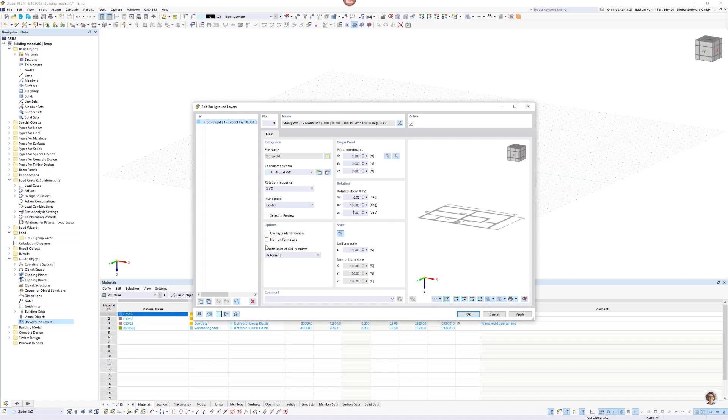I have a predefined DXF named Storey. I will change the rotation about 180 degrees to have it on the other side. I can check if I have separate layers, which is the case here, and import it. I will directly move it into the Z direction.

Now, when you look at the left side of this building, I will define my stiffening walls, my stiffening elements. So it goes from the left top corner to the middle corner, the bottom middle, and the left bottom side—that's where the stiffening core of the structure will be. And on the right side, I will create the facade elements.

Before modeling it, I have to go into the objects of the building model and define my stories. I want to define 5 stories, each with a height of 3 meters. So 1, 2, 3, 4, 5.

We have several options for the floor modeling. I will explain them all when we come to that, but we will start with the floor modeling set to nothing, which is just an advanced output of the structure. The other modeling types—rigid, diaphragm, semi-rigid, and also load transfer—require or generate different modeling. And with rigid or semi-rigid diaphragm, we can also have different nodal support modeling and different line support modeling. But I will show all that later on.

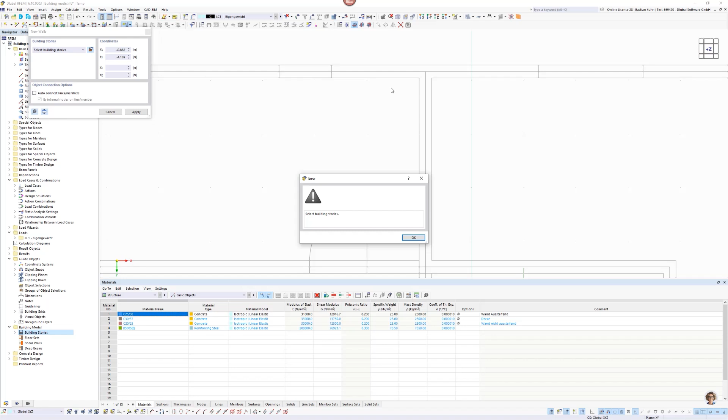You see, with the building story or building model add-on, there's already information coming on the mass of my structure. Right now I've defined two walls, or two parts of the wall, and I have a complete weight of 9.72 tons. When I'm moving it out a little bit, that's not enough, but maybe we can go a little further in here. So you see that the mass center is moving while I'm defining more surfaces. That's information already generated by the building model add-on.

Okay, so I have to do this now for each of these parts for the complete kernel, to this edge, to this edge, and from this to this. So my building is closed now, and you see that the mass point, or mass center, is nearly in the middle of the structure. And I already have a weight of 42 tons.

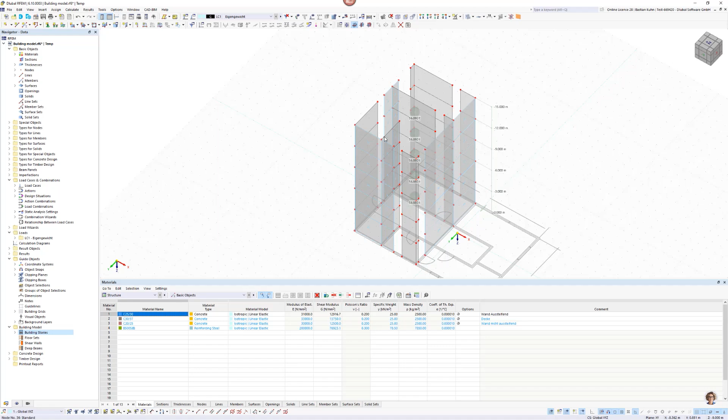And of course, I said it here in this case, we will need a few more posts, and maybe we will put some kind of drywall or masonry wall or something like this on this part in order to reduce the free span, because if I do not activate these walls in here, I will probably get problems with the deflection or the vibration of my structure.

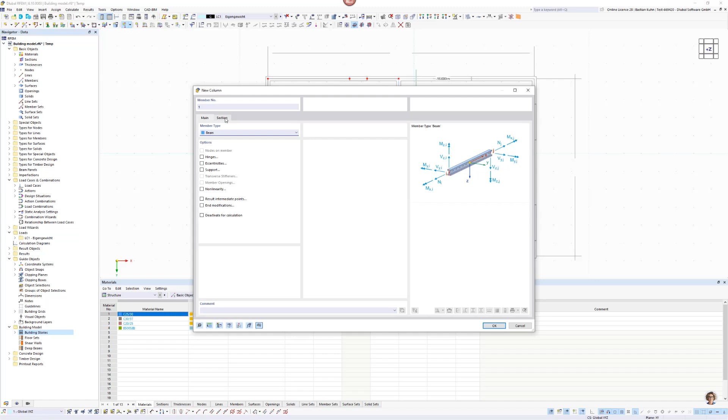So I will proceed with the columns. Therefore, I will define a quite bigger section inside here. Let's create a new section and give it the dimension 275 by 275. We can use timber material here, the so-called Baubuche, which is perfect if you have quite a high pressure force there.

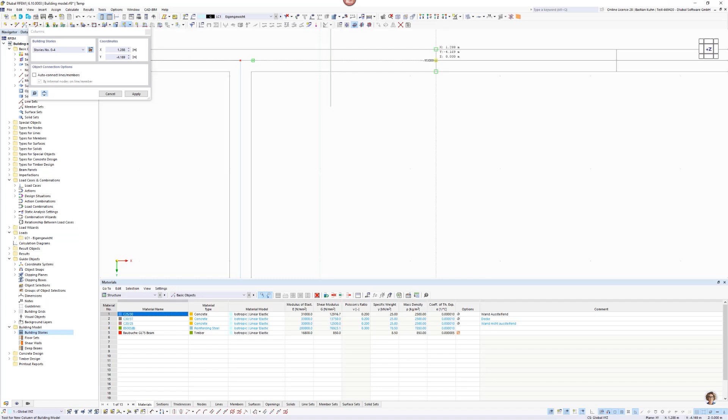And I can take a look if all stories are activated. That is the case in here. So I will say, okay, I have probably a column in here and a column there, and one on the edge here.

And where else can we have one? Yeah, probably here. This, this, this, this, this. Oops, that was wrong. Oh, I can just go one step back. And that's still working. Okay, so these are my columns.

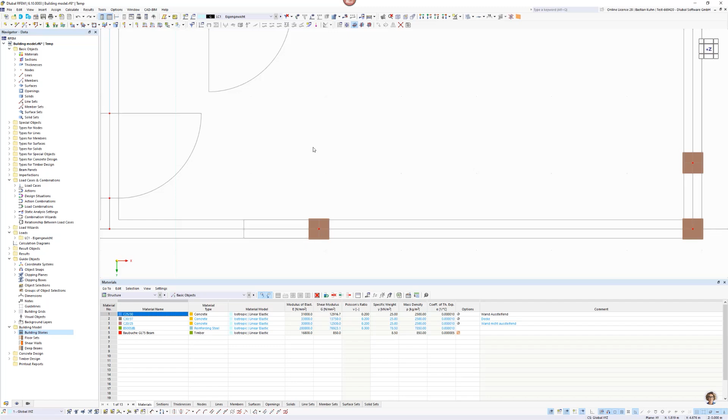This one's actually a little bit too narrow to me. I will also undo this step. So that should be enough for this now.

I can directly put a hinge on top of those columns so that they will not bear any moment transfer. So I say, okay, hold on, not the walls, I only want to activate the members. Edit, and define a hinge at the member, just a simple ordinary moment hinge.

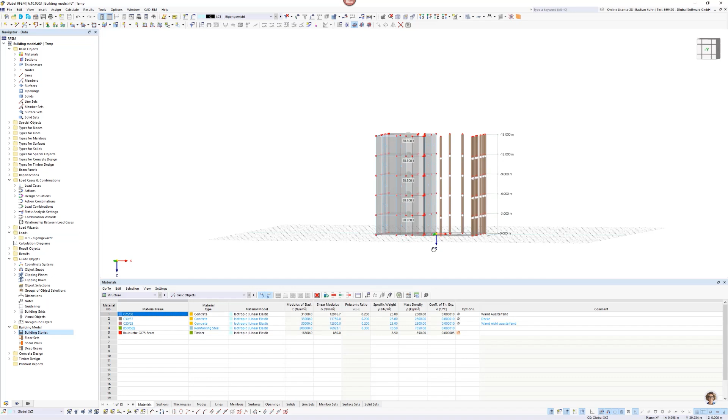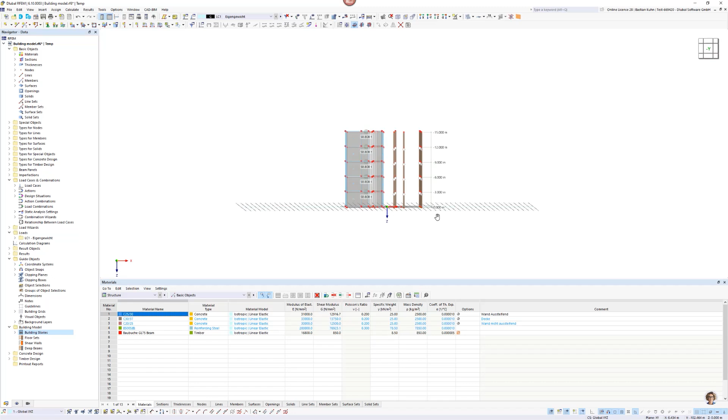Okay, so that works. And go back into the Z direction, or maybe I will define now already the supports, at least the column supports. That is also just a hinged support here.

And now, for transferring the force from the facade to the columns, in former times with the building model add-on this was not possible, as we used to integrate some kind of hierarchy to it. This is possible now, and I want to show that to you.

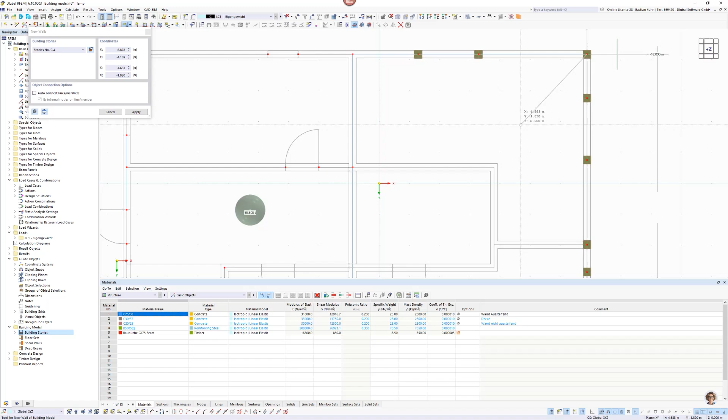So the load transfer surface can be quite simple in here, from this edge to this edge, and to the bottom edge.

Oops. And to this point. Okay. So it's also there.

I said in this area, I want walls that do not stiffen my structure. They should only put the forces from the top story to the ground.

So I will define again the load type wall, but with standard behavior, and create a new thickness called wall shear free. The picture explains this thickness type: it can transfer forces into the global X and Y direction of a wall element.

I'm choosing a different material, let's say wall not stiffening, and it can be a little bit bigger. Let me take a look at what I wanted inside it. We will take it as 175.

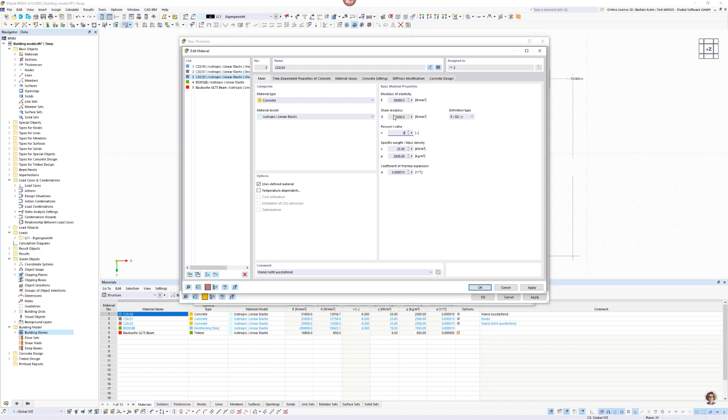We will take a look at the material and get rid of the Poisson's ratio in order not to get too many effects to the stiffness matrix. There's a stiffness matrix generated from this thickness type, which only has stiffness in X and Y direction of the surface. So that's how the forces are transferred. There will be no bending stiffness, or nearly no bending stiffness.

In case there is force out of the plane, it will get a high deformation, but this can be ignored. It only transfers force from this edge to this edge.

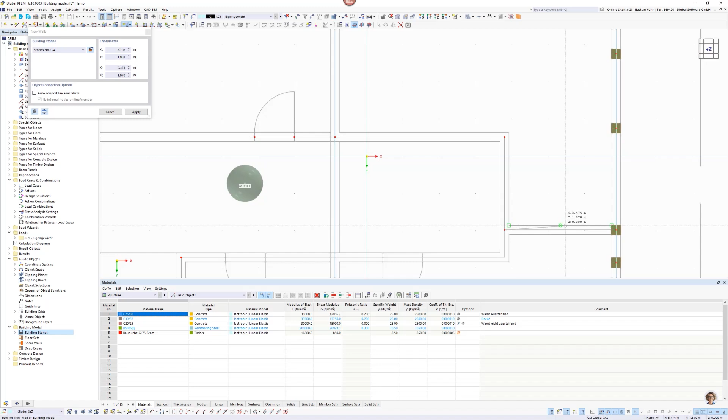So then I'm defining the first wall there, and this should be from this part to this part, and this to this. Did I activate all the stories? Yes, I think so. And from here to here, and here to there.

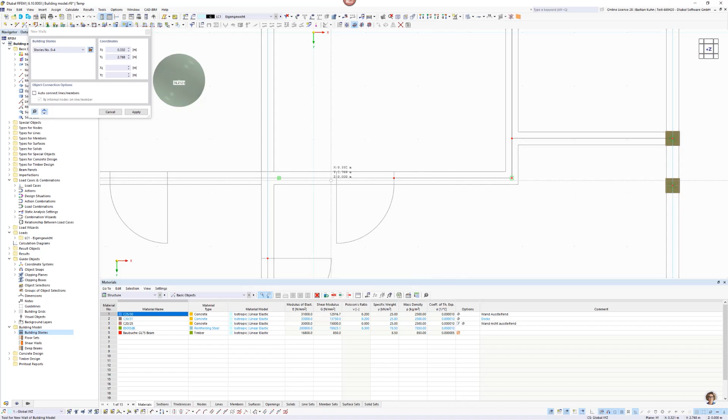So now my walls are defined, and I would like to add the supports on it. For the supports, I'm choosing a line support with local orientation here. In case I'm using timber material later on, I will have to do it anyway.

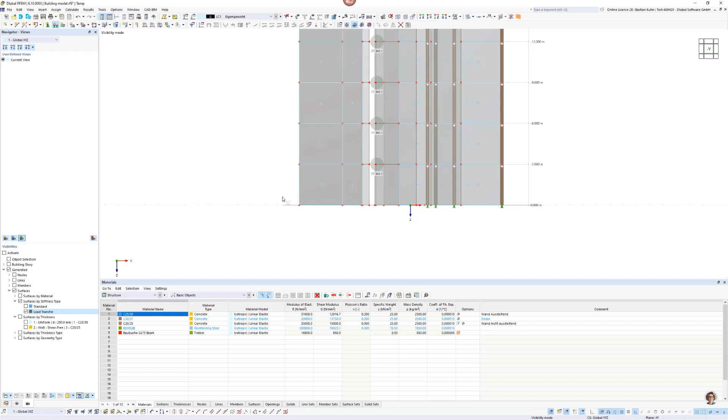But I also could use a spring constant for the concrete, just to not have it statically over-determined so many times, so that's also an advantage. Now, maybe we do not want to see the load transfer surface, because that will just cause effects we do not want. Therefore, I'm activating the load transfer reverse visibility, which avoids that. So that looks quite good to me.

The local orientation helps also with this. That did not work, but of course I can also delete it manually in here. This is okay, and here on this side that can also be fine - we just don't need it. It would just cause an alert, so it's not problematic, but I just want to avoid this.

Okay, we go back into the Z direction. Well, we could have also looked for the supports there - that would also be possible.

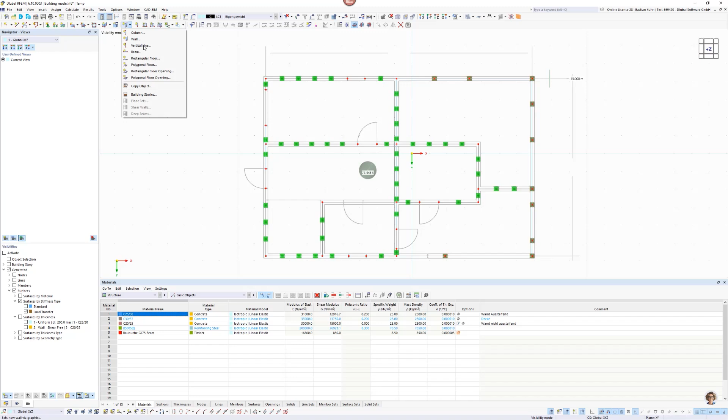And the last part is the modeling of the floor. We choose it rectangular to keep it simplified, and define a new thickness, uniform floor, with a dimension of optimistically 250 millimeter thickness.

And go from the left top corner to the right bottom - oh, that's not good, we have to do that again. Sorry, I was too quick in selecting it. Okay, maybe zoom in a little bit so this does not happen.

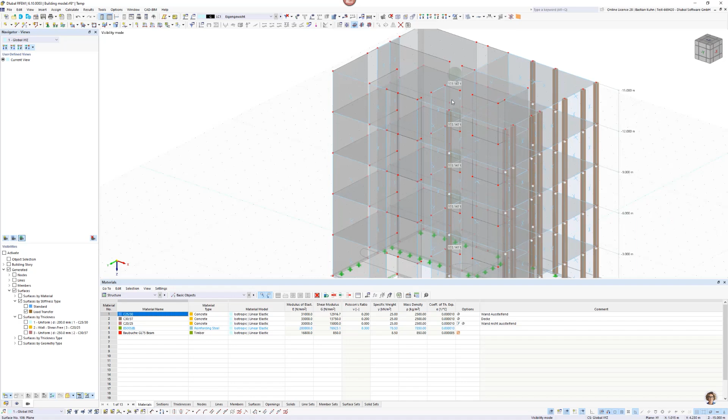So now the structure is done. Each story has a mass of 172 tons. This is it, and now we have to look for the loading.

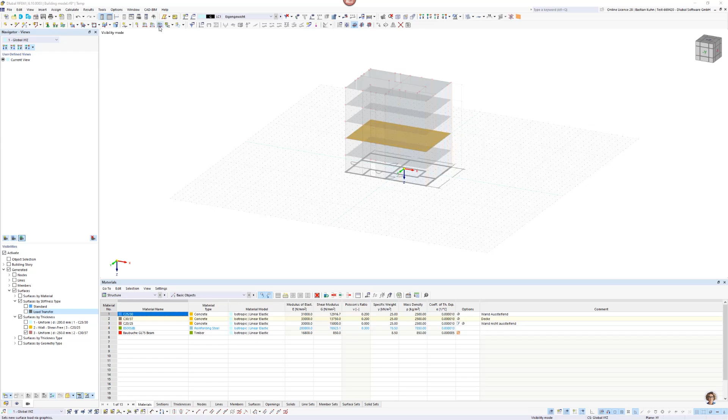Therefore, I will only activate my floor for the first load case and will define the load in it. So there I can use a simple surface load with a value - hold on, I also have to look at what I defined in here. So not so much load, 1.5.

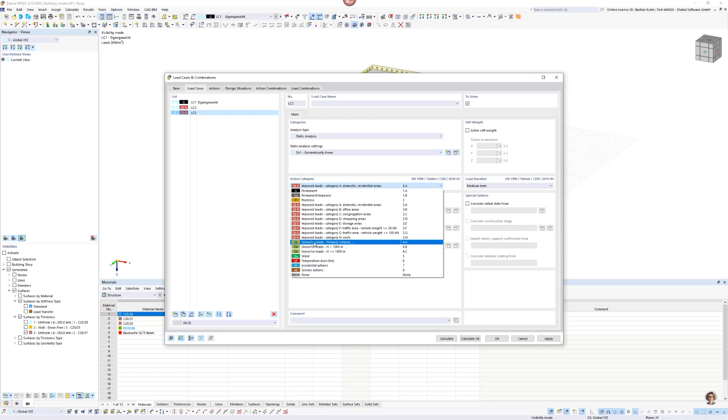Oh come on, is it not selecting it? So, on each story I want that 1.5. All right, and it's there, and I will define two more load cases, one live load and one wind load. When defining those, I can directly say okay, I don't want to use the combination wizard in this case - I will define that manually.

Design situation, I will also look for ultimate limit state and skip all the others, and define two load combinations according to first order theory. The first one should have the mandatory or main loading on load case 2, so that's 1.35 added load case 1, plus 1.5 added load case 2, plus 1.05 added load case 3.

I will assign that, and then do the same for the other side, but here the main loading will come from the wind load, in this case load case 3.

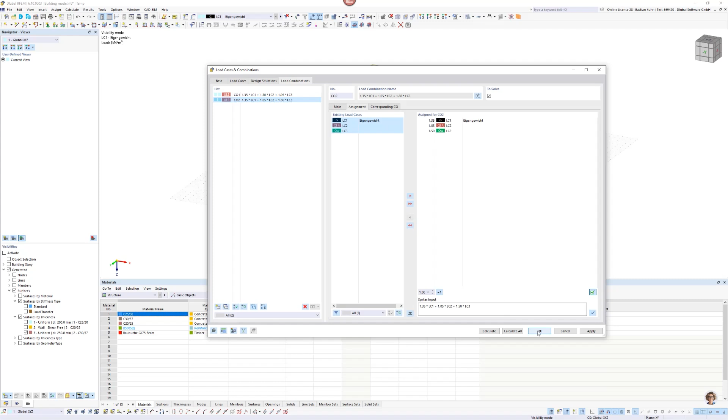Right, so that's defined. Then it is all in, but we have to define the loads for load case 2.

Therefore, we will maybe use a bit more force load, with 2 kilonewton per square meter. Okay, and when we go here into the load transfer...

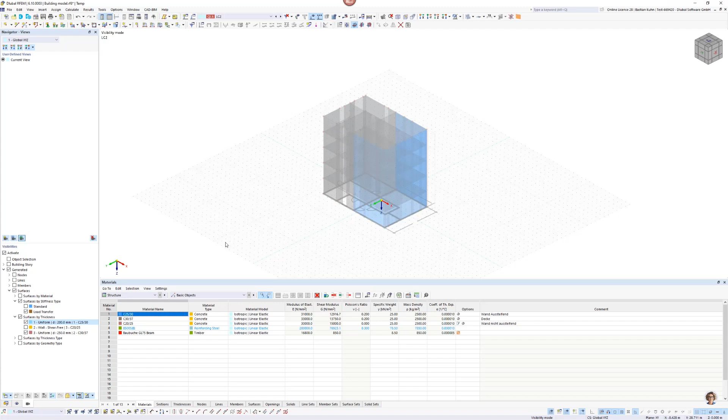Not the wall, the thickness. So here I can also define the wind load with a surface load of 2 kilonewton per square meter on the weak side of the structure, which will then be in the y direction.

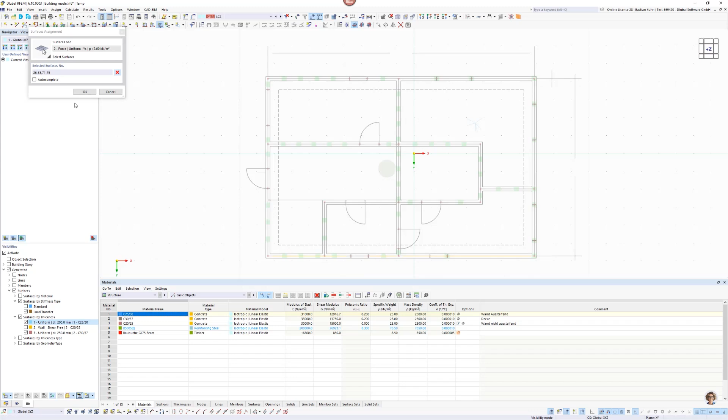Can move again to the z orientation, maybe though. Whoops. Right. Okay, and of course it probably has to be minus. So that looks quite good. And it is assigned then in here.

Okay, but I see it was the wrong load case where I chose it. So then we will undo this and go to load case 3 and define it there again. Do the same, so minus, and so on.

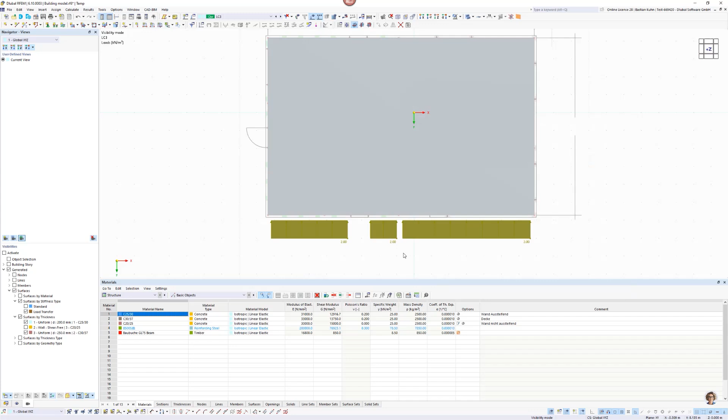Right, and all right. Cancel the visibility mode. So that's for the wind load, it works. For the live load and also for the self weight.

The load transfer surfaces themselves are not such an elementary function, I said it already. For detailed information about the load transfer surface, I have to refer you to the different webinar from my colleague Niklas Wanke.

But just to show you what it's doing here, I will let load case 3 calculate with the wind load.

Okay, so that's not what I'm interested in now. What I want to show you is the load transfer in it. Therefore, here in the display navigator, via surfaces, you have the selection loads from distribution surfaces, and there you can see what it's doing. So it's transferring the horizontal force here to the edges of the floor and also to the columns. That's what it's doing here.

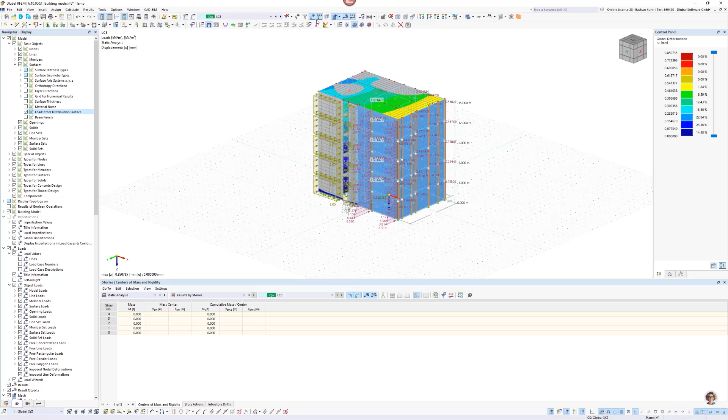Okay, but for the other ones we do not have to look for the load transfer surface, and therefore we will change that by just showing the load transfer and showing the reverse visibility.

And so right now, what information did I get from my building model add-on? I have the information for the, I will also skip the view of the mesh, it's not so interesting. I mean the mesh is nice, but we're not so interested in this here. And maybe also not show the surface sets.

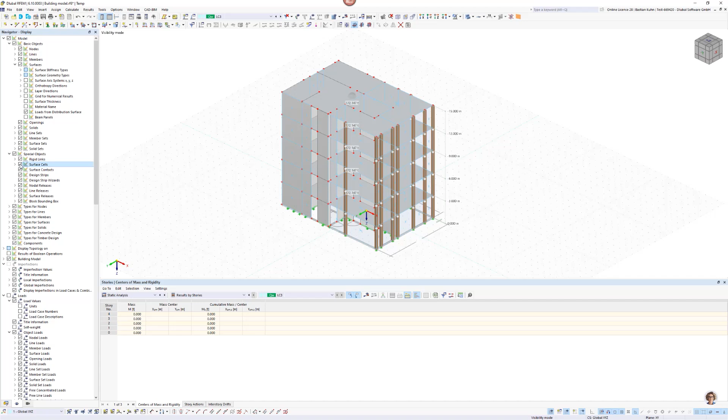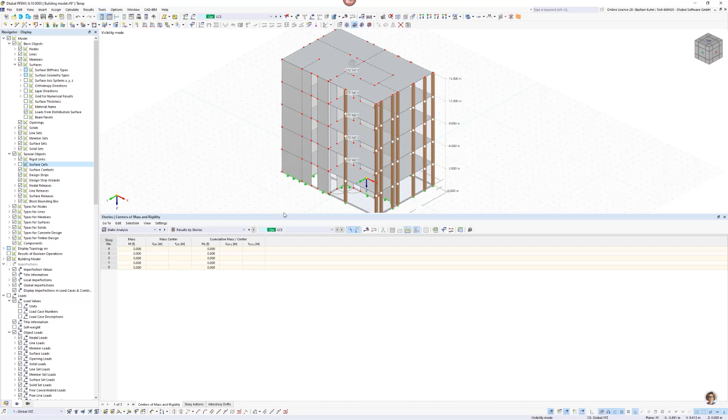So I have the mass center in here, and already by this information that I have in here, I have in static analysis as a chapter, a column results by story. And there I will have, of course, the masses. Well, but not in load case 3, we would probably have to go for load case 1.

Okay, so you see in load case 1, we have the masses with the load that I put onto it. I have the mass center, I have the action in each story. I have story forces that are transferred, and the location of the resultant story and the interstory drift. I have also the option to display this force graphically, that's coming into it.

Therefore, of course, load case 3 can be more interesting as it shows the horizontal force in X, Y, and Z direction. Okay, of course Y in this case is more interesting.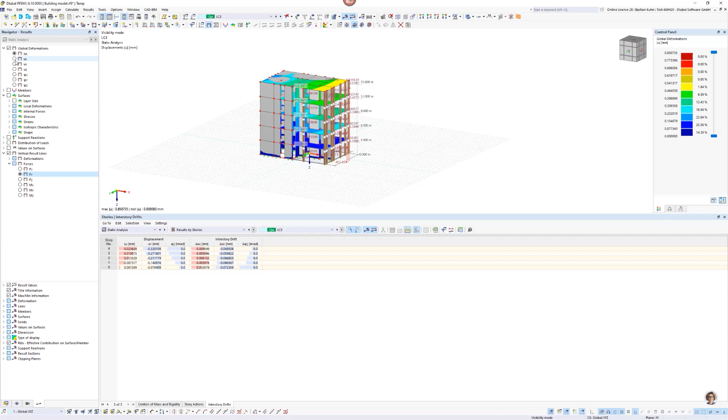And that is this. And additionally, I have even more options with this. I can name walls that I'm more interested in. So when I take a look now at the forces, of course we see now the deformation in here. And if we do not display the model, you can have a detailed look onto it.

So the deformation is really not big, but maybe when we go to the wind load, or to the load combination where the wind load is the main guiding load, okay, there is a bit more load that can be seen.

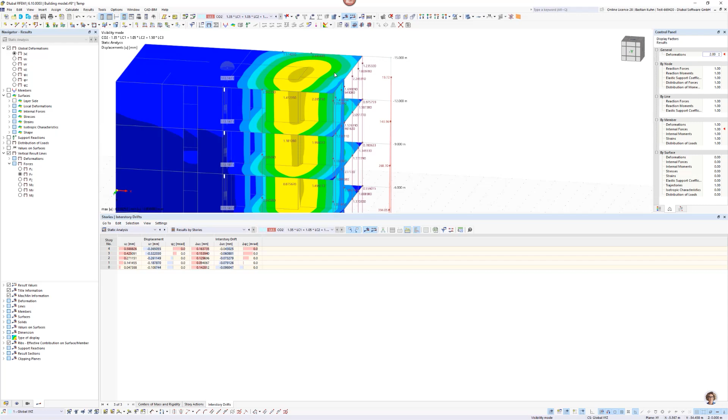I said it already, because of the weak bending stiffness of the shear wall, you have some local deformations, but if you look at the local deformation, it's like a little turning in this direction, which of course we would like to see here.

And when we now look for the force in the surface, the shear force in each wall, you will find out that, okay, the main load is coming here on the inner wall, where of course you have the stiffening part of it.

So how can we regard that? I will put the model back on, and for this edge, and maybe also this one. So I have one in global X direction and maybe also this one in global Y direction.

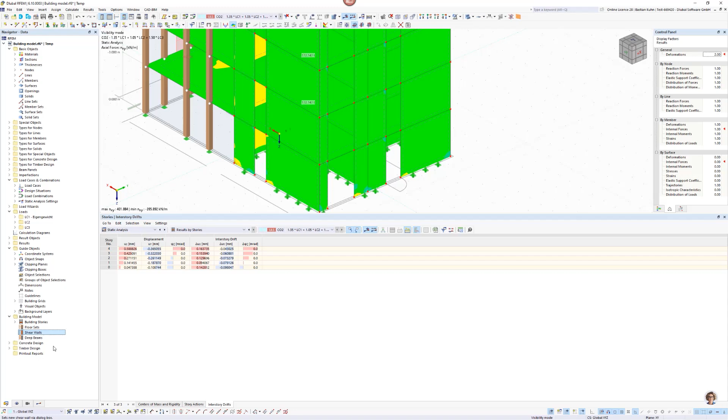I can define in the building model add-on floor sets. They are created automatically, but I can create shear walls. I will define shear wall in here. I can select surfaces and surface cells. Surface cells are perfect in case you want to create timber frame walls.

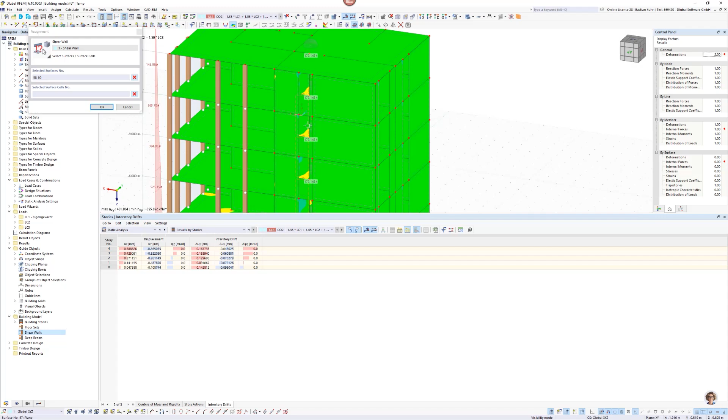But right now, this is a concrete structure, so it is sufficient to use the usual surfaces. Then I can generate a result section here. I can design it. The design properties are activated, and since it's concrete, I can do a stability analysis with the concrete add-on. I have the covers in here, reinforcement, and so on.

But here in design configuration, that's an interesting part I wanted to show you from the building model. It is choosing the deep beams and also the shear walls from the building model add-on, so the software will automatically put the reinforcement in accordance with what is activated in the building model, from this wall into this surface that I'm defining here.

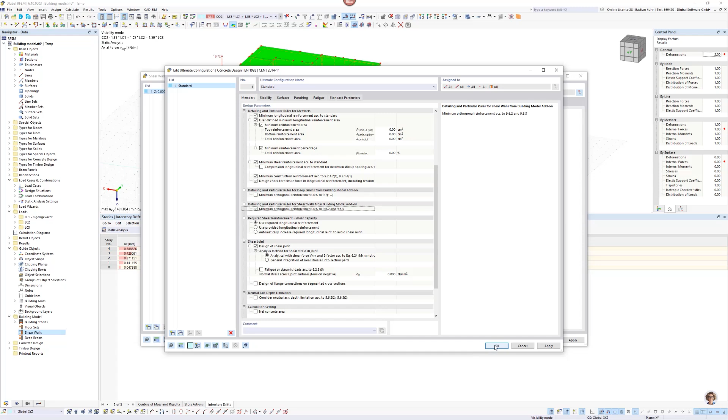Okay, that's quite important information. So we can do this on one side, and as I said, I will also do it as an example on this surface. I will also generate the result section and press OK and apply it.

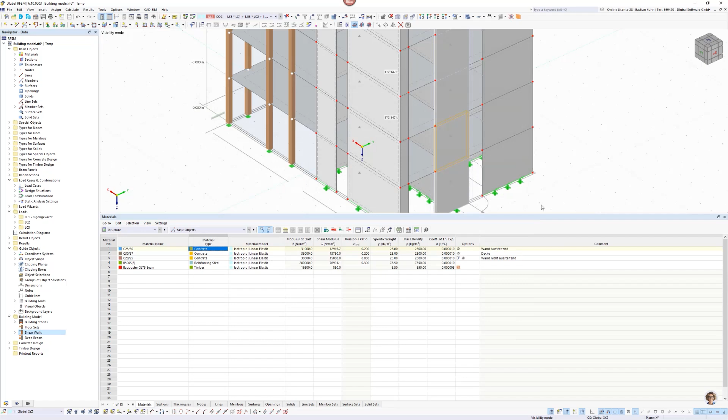Well, okay, so far not much has happened in the structure since I do not have results, but you see that I now have the sections here in every story, and a result beam is generated automatically. Via this, the design is done. Now let's calculate the combination 2 again.

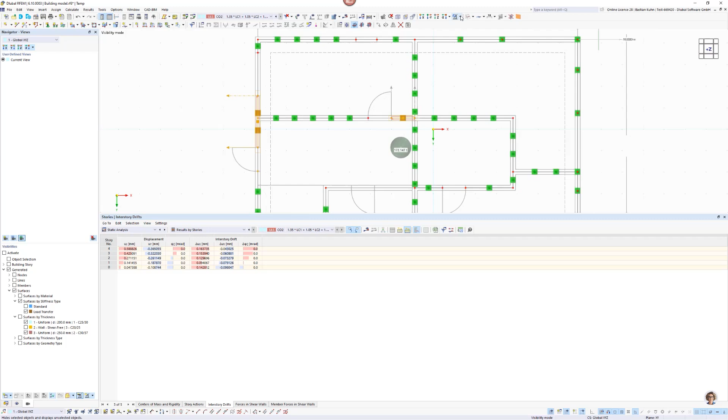Then I have now the result section in here, and maybe we will just look for our result sections, so we'll only display them in here. Maybe we'll skip the concrete information on it, as we are not so interested in the reinforcement right now.

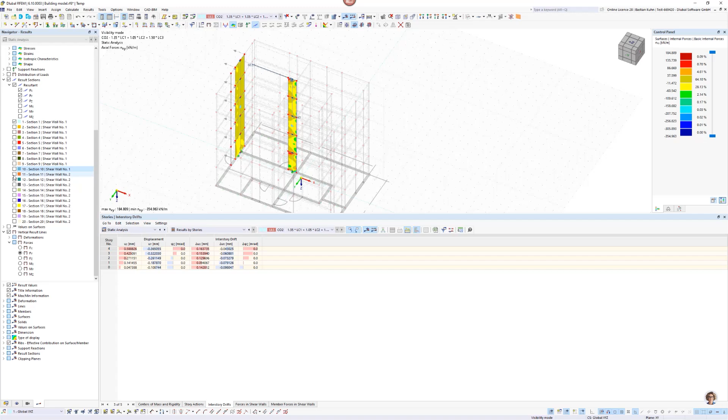And so now when we activate the resultant, let's choose the section on top of each of this - oh sorry, that's the wrong one - of this, I have now on the top story the vertical force, then additionally for the wall underneath this, the next one, and also the horizontal force. So all the forces I can have graphically in here.

I have the section of it, and I have the member forces in it, so I can also see the normal force here, 127.5 kilonewton, in the graphic. Let me show, I think the previous visibility will work. Yeah.

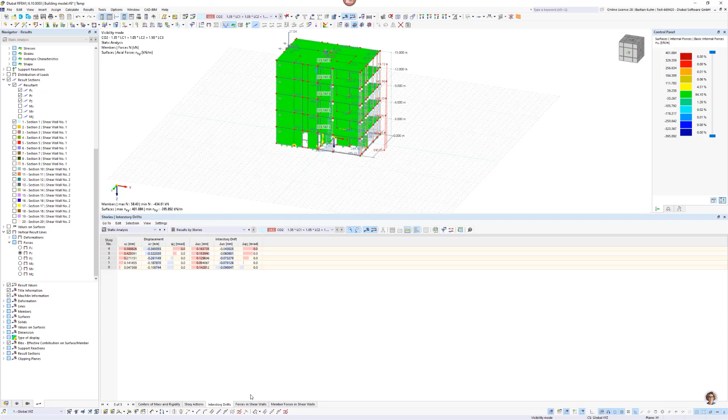So I have all this graphic output of it, and I get now the additional information about the forces in the shear wall that register, or this column I did not have before, and also the member forces in the shear wall.

And here in the member forces and shear wall, you also get additional information for the compression and stability, so what the critical compression load is compared to the force that's putting onto it, in relation. So you see, we are far away from any problematic critical stability issue - that's just an indicator that more force can be put into it.

Okay, so this is the information you get by the building model without changing the floor modeling. Now, what happens when we change the building stories modeling to the already mentioned rigid diaphragm? First of all, when I activate rigid diaphragm here, the nodal support modeling can be chosen or defined, but I will keep it now with fixed hinge support and select OK, and it requires that the mesh is deleted, of course.

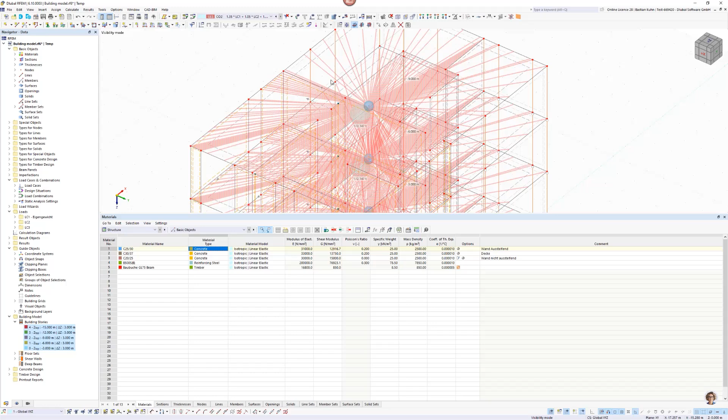So then from the mass center of the building model, to each FE element of my structure is defined a spider connector, or it is named rigid links inside. I will skip showing it because it's not so interesting, but it is important for the modeling. And when we select now one of the stories, or maybe even better, if we look now for

the building model in the data navigator, you see that additional floor sets are defined here, and this is overwritten into our story. So there was a stiffness type standard, and this is now overwritten by floor slab rigid diaphragm, with the load transfer distribution set to isotropic FEA. And similar to the facade walls that I defined, you can also choose the stripes method, which I will do now just to show you what this means.

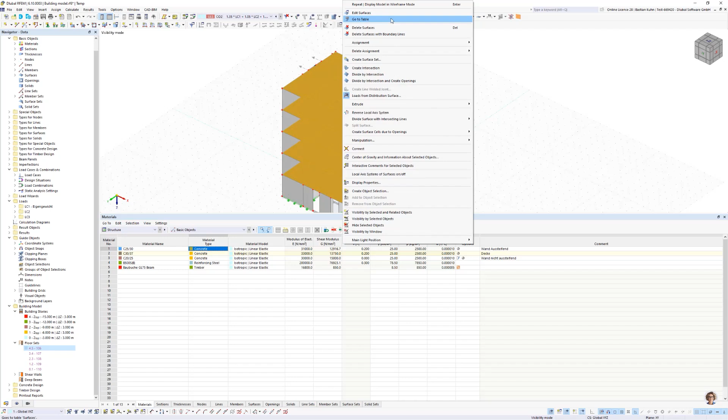Hold on, select them, edit, and I would choose XY stripes and uniform. This is one of the advantages, or new advantages, of the building model add-on. A few weeks ago it was not possible to define a facade wall with a load transfer and a floor with load transfer. It was just not possible, and now this is possible here.

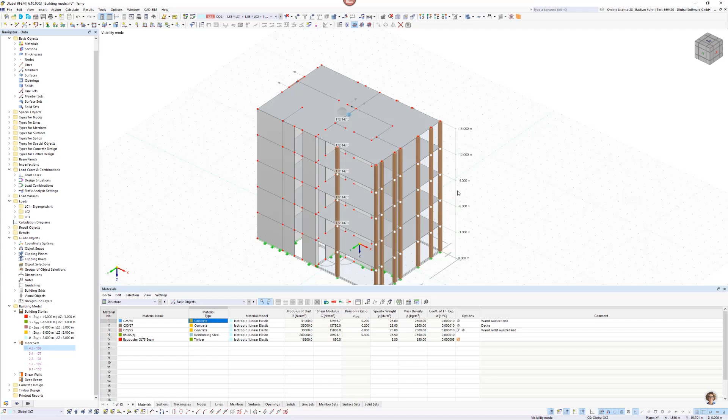Okay, so far that's the only difference. And we can also calculate the results of the combination too.

So I don't know if you saw it, but there were actually three kinds of calculations done. In connection with this, I have also three types of analysis results. In the data navigator at the top I have walls, floors, and walls and floors global-local calculation. The walls themselves calculate the forces in my walls, and I have the results by stories in order to put the output out of it.

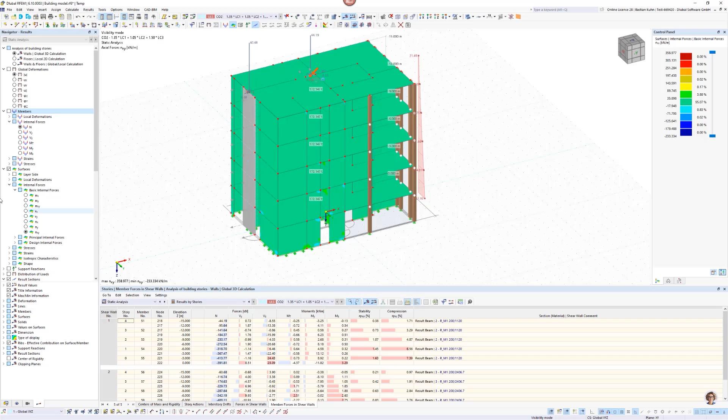Additionally, I have here the center of rigidity. So when we skip this and go into this view, you see that we have the mass center.

Maybe we will also skip the result sections here, I'm not so interested in this now. Let's activate in the result navigator the center of rigidity. Then you see that the stiffness center is different from the mass center, because it is on the left part of the structure, as this is the part with my stiffening elements. Here I only have the load transfer surfaces, and I have the walls that do not transfer any shear force, and these columns here also do not contain any stiffness in horizontal direction, either Y or X direction of the structure.

All right, maybe we can also get rid of the grid. So, okay, then you get this information and also this information here. This is all important for the walls.

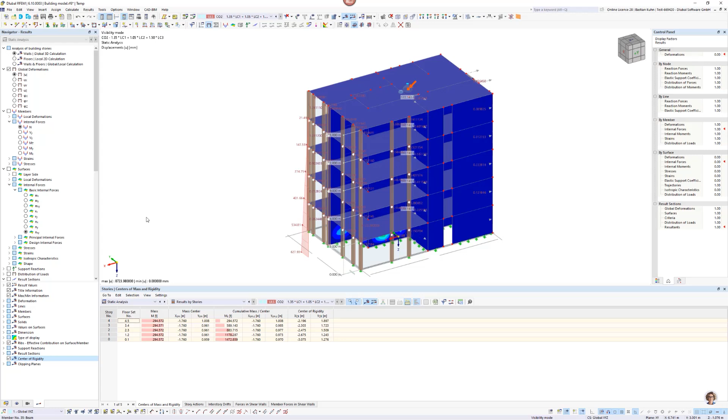I will activate the global deformation here. Yeah, we have this little local point in there, but that's not so important. Here I have my shear forces inside, that is the important information I'm receiving from this. And then that's the information of the walls.

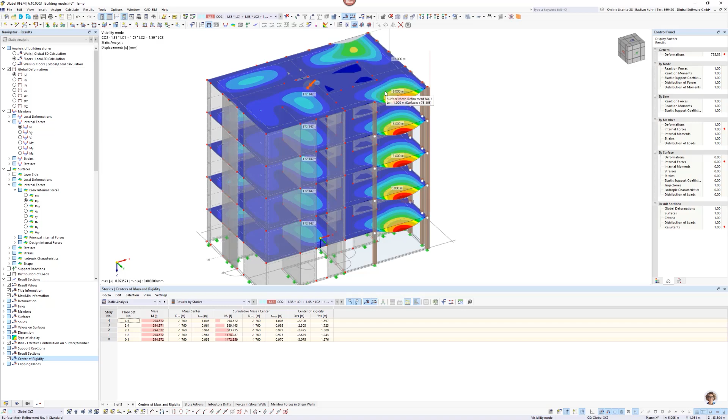Here I have the information of the floors. NXY is not important information here, but here I want to look for the bending forces in the floors and also the deformations of it. So when you design the structure with each position separately, this is what you will do there as well. We have separated or reduced the number of results here for these floors.

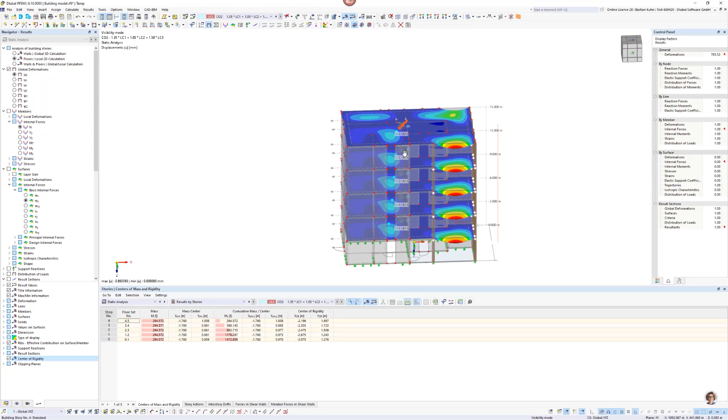And then the third one is walls and floors in the local, in the global-local calculation of it. On the floors, I think it's easier to show what this load transfer, sorry, this override line is doing here. So we maybe look for the self weight, and you see that now the loads from distribution forces, so the 1.5 kilonewton, is separated via this load transfer to each part of this. So this is how this is done here.

I have also prepared a detailed example of what is done in the background, but before I do so, I will just show you, for your information, what it's doing. It's using the force from the 1.5 and saying, okay, 7.96 I get from this story, and I put it here to the wall and directly on the one underneath, and so on. That's how the building model, or the intelligence of the building model add-on, works.

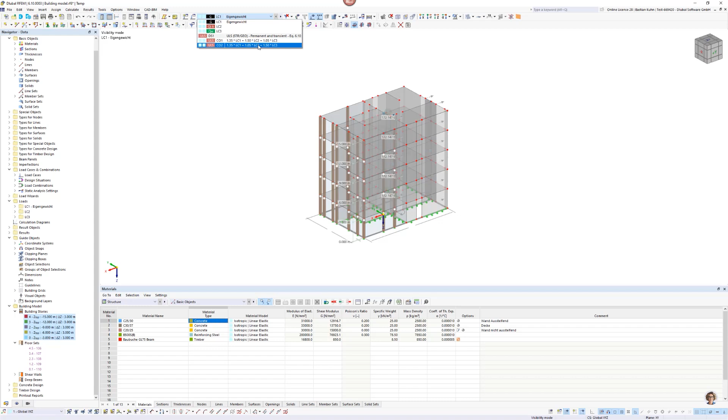Okay, I will go back to isotropic, as this is the quicker and better load transfer direction type. And before I show you the internal submodel that is generated during this process, I will just, for your information, hold on, what we will do: we'll go to the combination and look for the deformation in X direction.

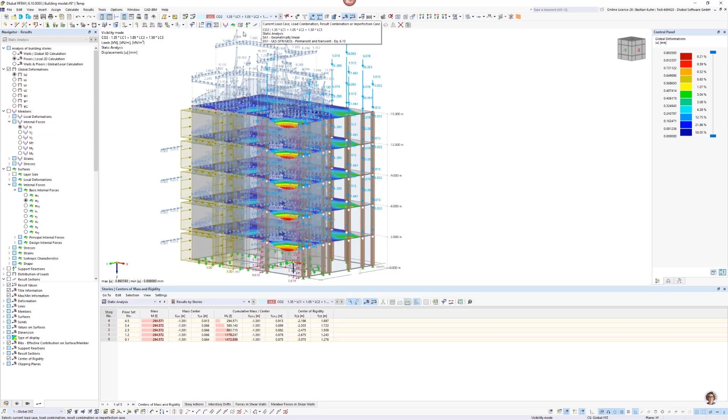So you see that now the force is really different that is transferred in here. I would like to also take a look to the self weight of it.

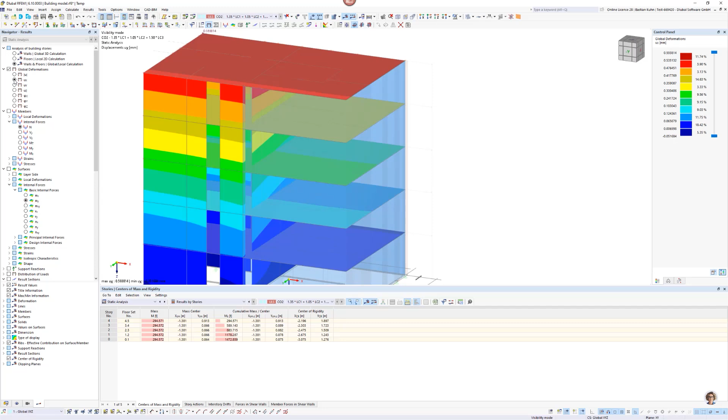So when we put it a little bit more in this, okay, so you see that it's moving out of this plane area. Maybe nodes can be shown, and also members and lines, of course.

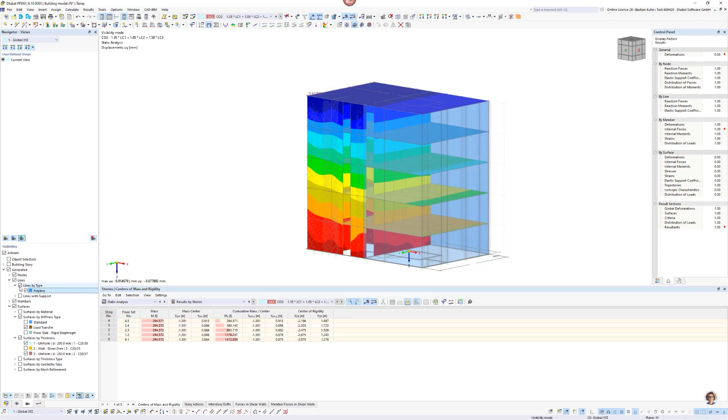Why is it not doing this? So here, this one's, and nodes also. Okay, so you see now the deformation.

And now I'm changing the nodal and the line support modeling in the rigid diaphragm, and I would like to choose the type. What do I want to choose? I think I choose hinge rigid, and here also hinge rigid. I think it was this amount, but it is not that important. I will show later on what this is causing.

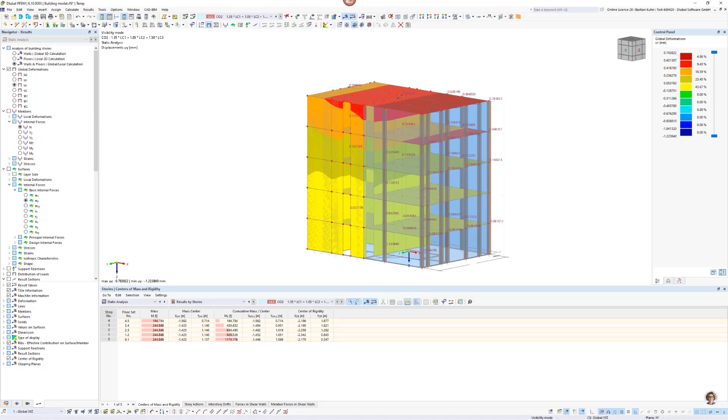So what did the software do now with this here? And therefore, I have this different model that I would like to show you. And I would put this on this side and this one on the right side and show you what this is doing. So I have here modeled three types of sub or models that show how the software is separating the force into it.

So this one is the first definition that I did in here. So when we go back to this one building story and say, okay, rigid and also fixed for all definitions, it's again deleting the mesh, and we look for the load case 1 with the results on it.

And here we will also look for the load case 1 with the force on it. So you see here in load case 1, we have the weight of it, or maybe we will go to the load case 2. Actually, I think that is better because we do not have the self weight of the quite heavy concrete in it. You see, I have here

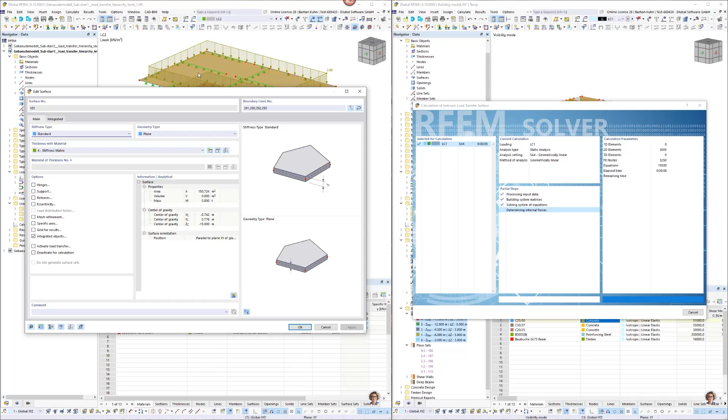The very stiff surface. For your information, it's always possible to see the stiffness matrix in this, and each point here is modeled with a support, each story.

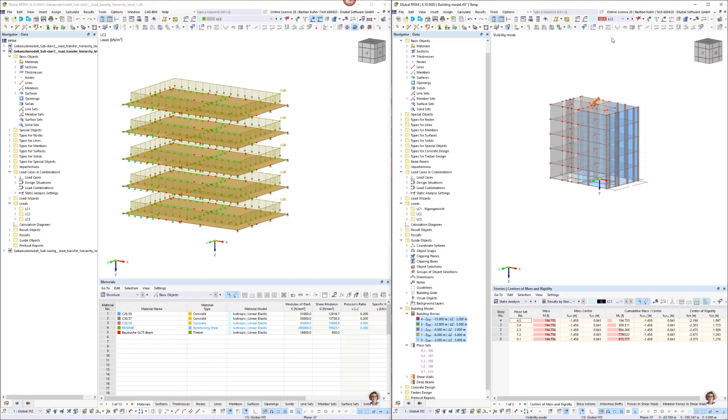Okay, I said it, I want to have it on load case 2.

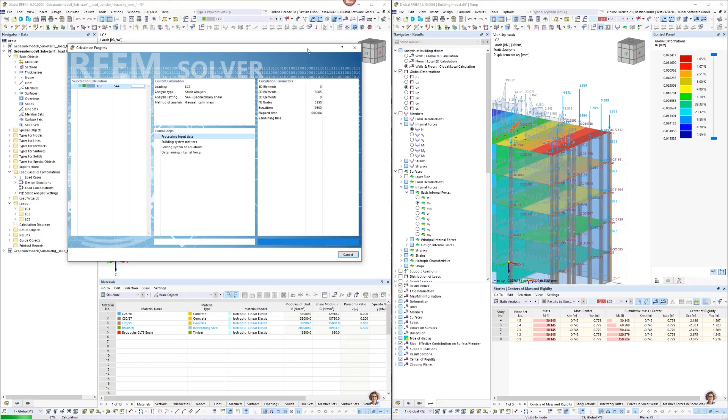Okay, and now I'm activating here for the load case 2 my load in it, and also let the load case 2 of this structure calculate. Okay, and look for the reaction forces.

So now that we've calculated this, I think actually, let me maybe reduce the decimal places a little bit of the result. Just regarded that now is probably too much, not so important in here, but yeah, it can be a little bit confusing.

So if you look for this, you see that here what is done in the global 3D model is the force that's separated via the load transfer function is what I receive as a result in this model that I created. And this is, as I said it already, containing the supports hinged here on every part and a very stiff stiffness matrix.

And now the question was, how is it changing this submodel when I change the building stories in here from a little bit out from rigid to elastic column hinge rigid, and of course also for elastic wall hinge rigid. That was the example. Therefore, I created a different example. It's called submodel rigid 2.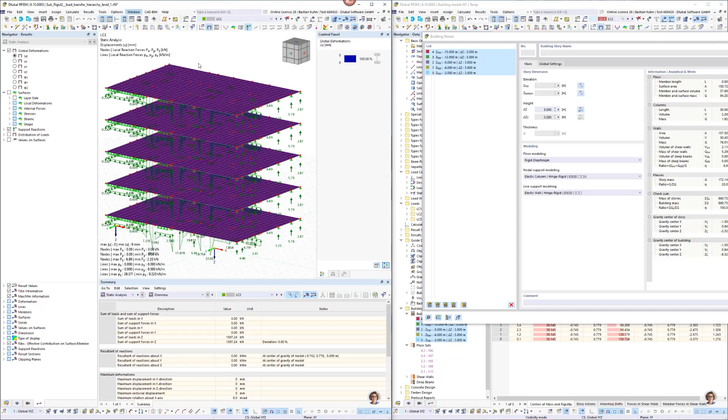And there you see, first of all, okay, the surface, that's the same. It's the same stiffness, so very stiff in here. But the difference here is that the line supports and the nodal supports

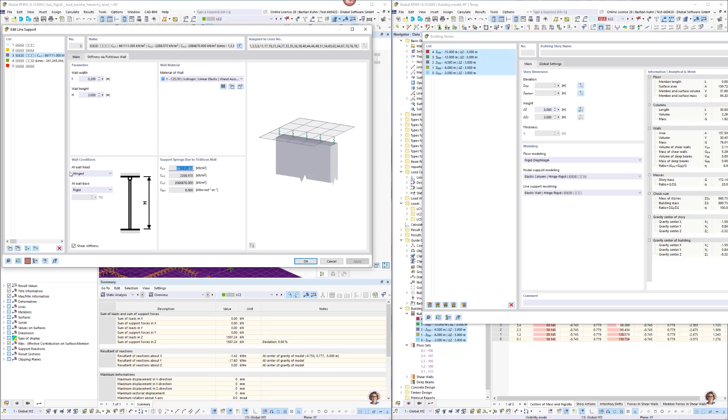are now changed. Then they have a spring constant, linear, and this is defined now with this spring constant. And that is exactly what is done when you change the nodal support and the line support modeling in here. It's taking the wall width, which is 20 centimeters, the height of the story is 3 meters, and because of this material, it's calculating this stiffness in here. And as you see, it's hinge rigid, just what I defined in here. I can also look for the columns.

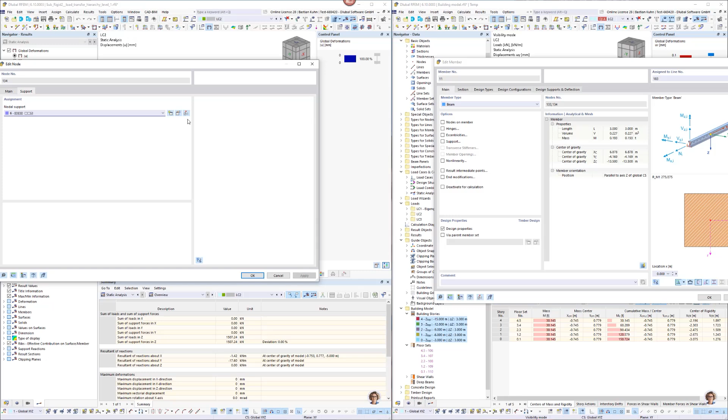If you remember, for the columns we chose this dimension: 275 millimeters thickness, Baubuche material. And when we added the nodal support here, you can see that these dimensions are also transferred into this submodel.

That is the intelligence of the building model. Now what happens when you say, okay, I don't want to calculate with concrete, I want to calculate with timber material because it's a nicer, more ecologic and also more economic material to be used? How can this be done?

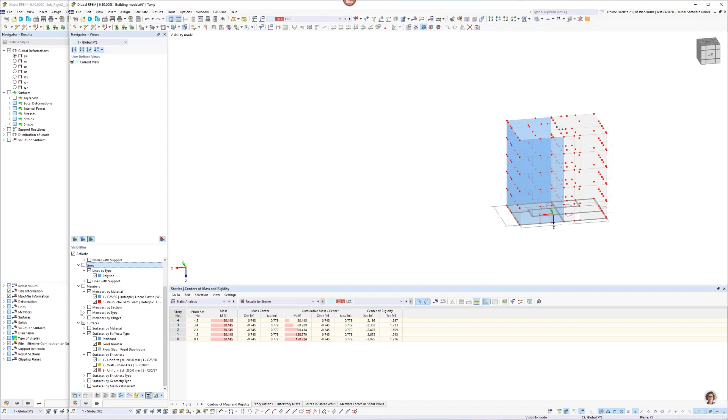Let me first get rid of the transfer surface again, the load transfer surfaces. So imagine we say, okay, we don't want this shear wall type here anymore. We want to have CLT here inside. So we change that and remake it.

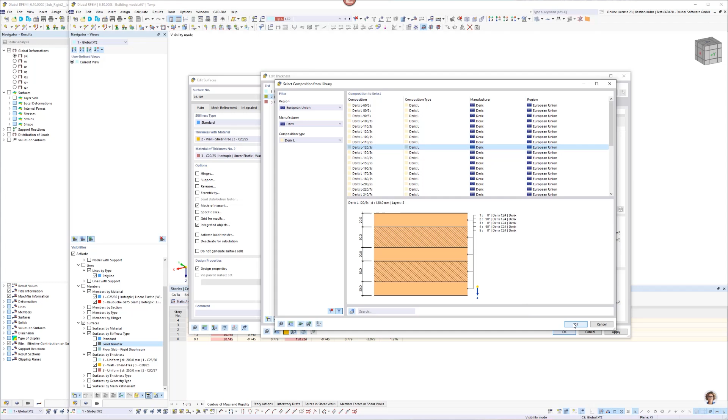It will be layers, and we go into the database and choose a quite thin 5-layered CLT plate. And of course, I'm not doing this now in completeness.

Now the floor should also have couplings inside here, because this is roundabout - let me take a dimension line - from this edge to this edge, 50 meters. So that can be produced and brought to the job site, but not for the complete width.

So there has to be some kind of connection in it, and this has to be regarded. That does not work with the rigid definition. If you remember, here are defined rigid links into each edge. So how can this be regarded here?

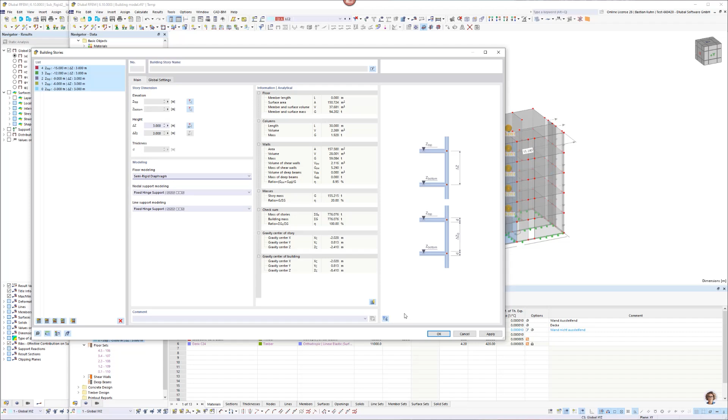This can be regarded by the building model add-on with floor modeling semi-rigid diaphragm. There's no visible change, but here in the stiffness type you see the semi-rigid diaphragm is used, and the load transfer is more or less the same. And here I don't have rigid links anymore.

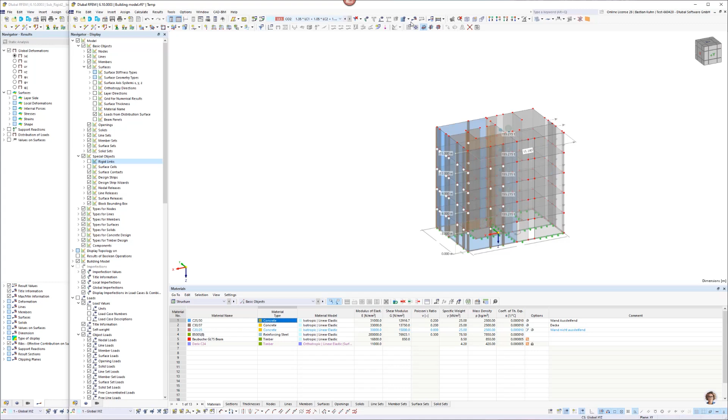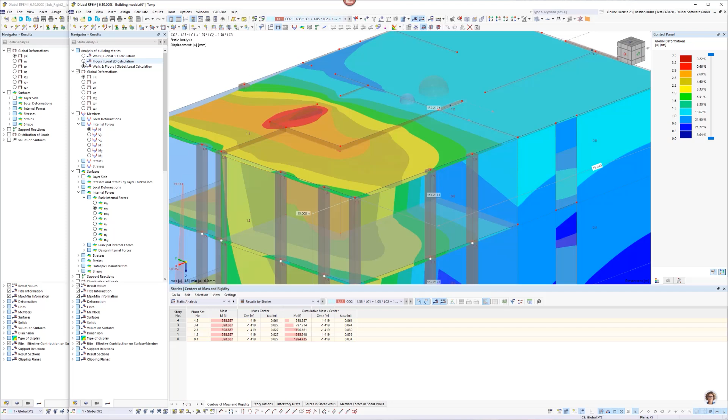Also the output information is still the same, but as I said, now it is semi-rigid. And how is semi-rigid done? I made again a model for this to compare it.

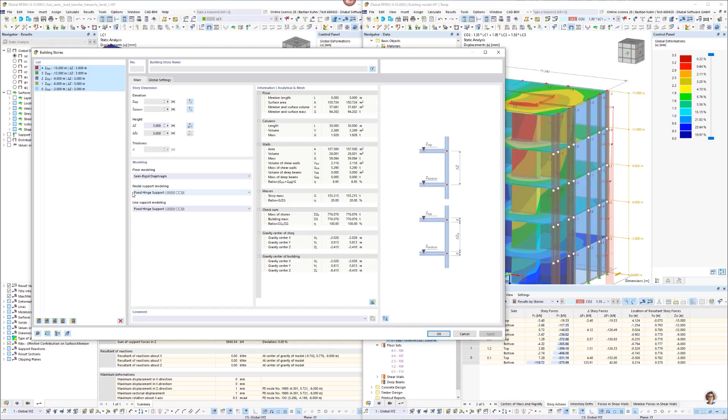That's called semi load transfer hierarchy. So the supports, I did not change them. I left them on fixed hinge support, but here the complete stiffness is chosen as it has been defined here.

I hope you gained some valuable information from this webinar. Let me summarize what, from my point of view, was important, or I wanted to show you: that now with the hierarchy transfer, it is possible to use or design facade elements and put, for example, the wind load for more complex structures directly to your structure.

The semi-rigid diaphragm is a function where you can also regard couplings either in concrete or CLT floors and decks. The stiffness center of the structure is different than the mass center, and the output of either reinforced or not reinforced concrete or timber walls are possible via the design configurations.